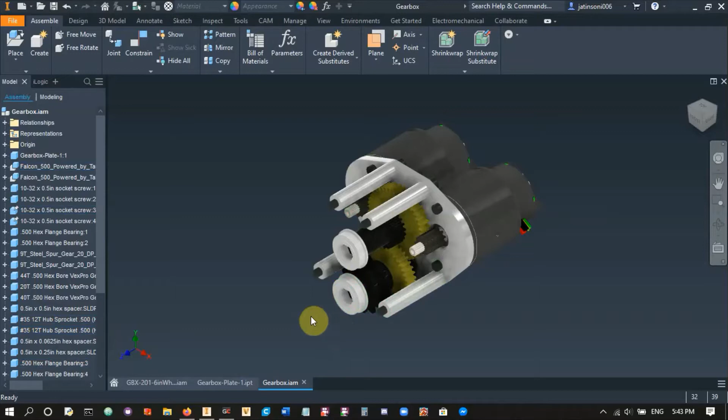Obviously we want the second plate to have the same dimensions between these four holes, these two bearing holes, and all of that. So we could open up the sketch for this plate, copy it, and make a second part. That would work. The only problem is if I were to go back and change something on this plate, like bigger or smaller gears, my second plate wouldn't change.

I would have to go on the second plate as well and change those dimensions. So instead, we can use what's called derived parts, so that my second plate depends on this first one, and anytime I change anything about this first plate, the second one will also update. To do that, we'll go and start a new part.

My setup automatically starts a new sketch, but we don't need that. We'll go under Manage, Load, and if you see here, there's this button called Derive. We'll click that and it'll open up a dialog box.

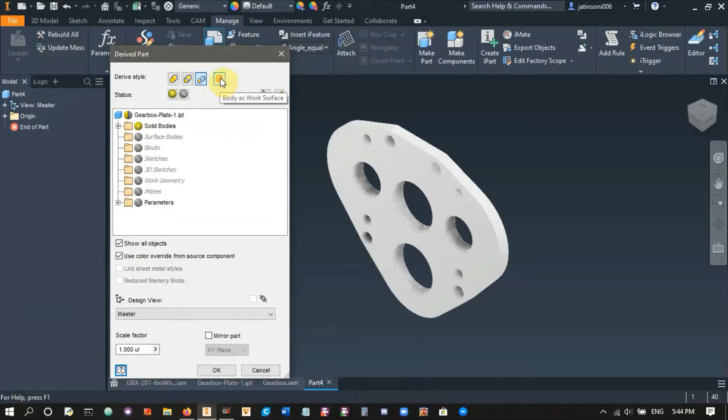We want to click on the first plate, this one. Hit open and it'll open this settings box, and we want to select this orange flat symbol over here. What this basically means is it's similar to construction - it creates like a surface, and won't interfere with our extrusion or anything like that, and won't think there are two different parts.

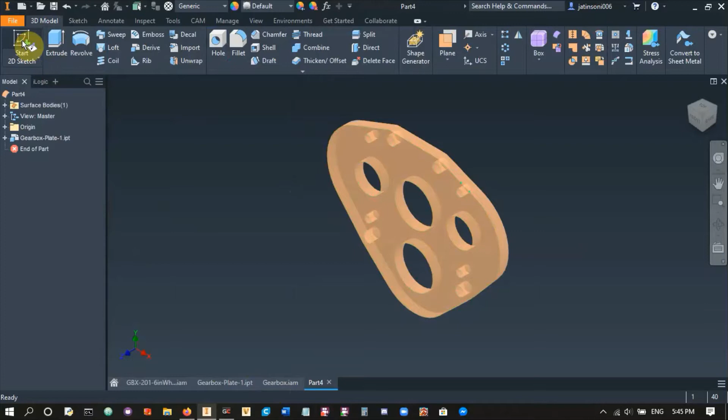So we'll do that. What deriving parts basically does is create a link between this first plate and our second and whatever else we do on this file. Now we can start sketch on this XY plane, and here we can use project geometry. What project geometry does, if you don't know, is basically make any holes, circles, or edges a part of your sketch.

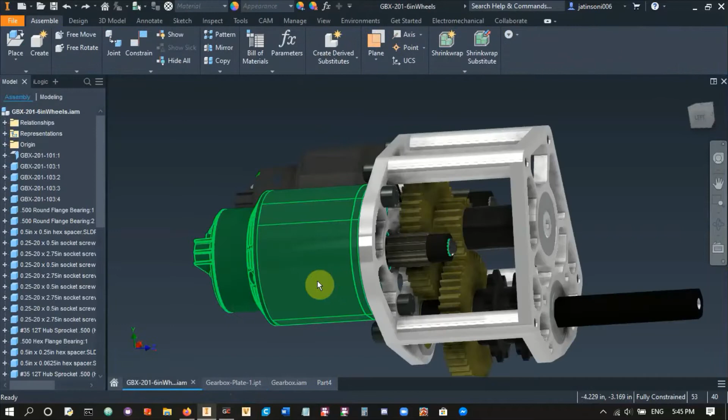We don't need these motor holes, because the motor holes are already done, they're ended here. We don't need anything here for them. All we need to do project geometry for is these two bearing holes and our four holes that hold the gearbox together. If you look on a completed gearbox, we have the two bearing holes and these four holes for the standoffs that are here.

Now you'll see that there are actually four additional holes, and what these holes are responsible for is attaching this whole gearbox to the drivetrain. So let me open up our drivetrain for last year.

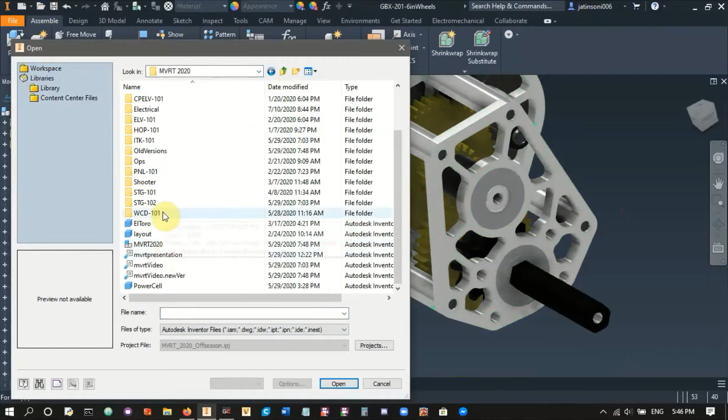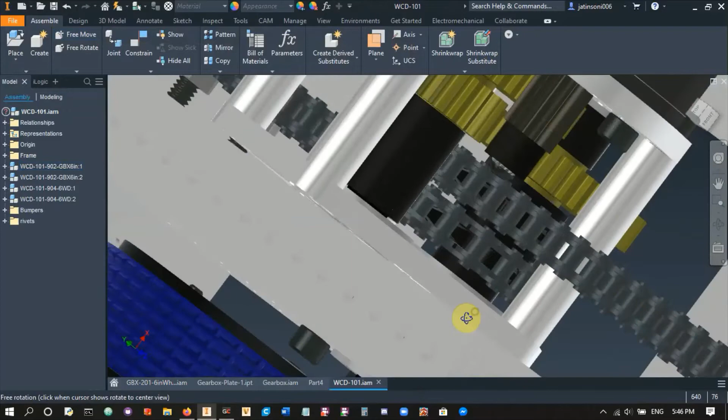So let it open. Okay, if you look, let's get rid of the bumpers. You'll see here that the gearbox is attached to this 2x1. So that's my gearbox, that's the 2x1. It's attached using these four screws over here.

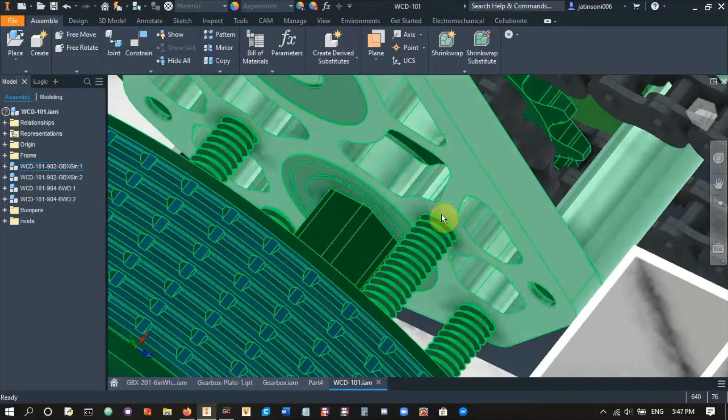What happens is these four screws you see over here, if I move the 2x1 out of the way, attach to our gearbox plate, and this is where there's a tapped hole so the screws can thread into the aluminum plate. There's also a tapped hole for these standoff holes because there's no lock nut over here. So we'll remember that all those holes need to be tapped.

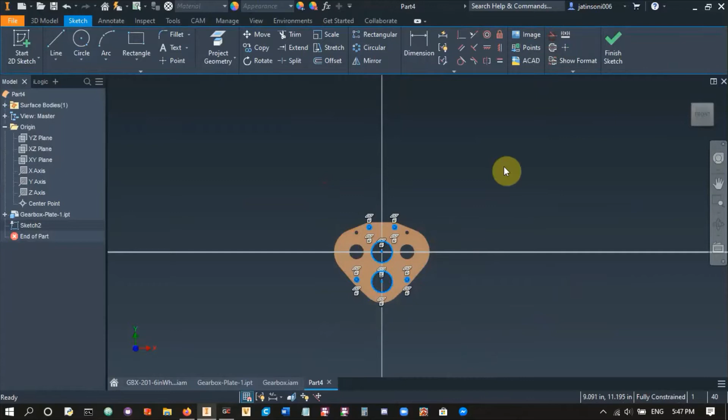So what we can do is make four additional circles over here. Before we start that, let's make all of these non-construction - it should automatically keep them solid. I think I have a setting that makes them construction. So we'll do circle, and let's make four more. We'll make one there.

At this point, we can go over here in surface bodies, hit plus, see this one, and right click and turn visibility off, because it gets a little bit annoying to have to see that thing the whole time. So we'll be left with like a normal sketch, and what we can do is add two more circles.

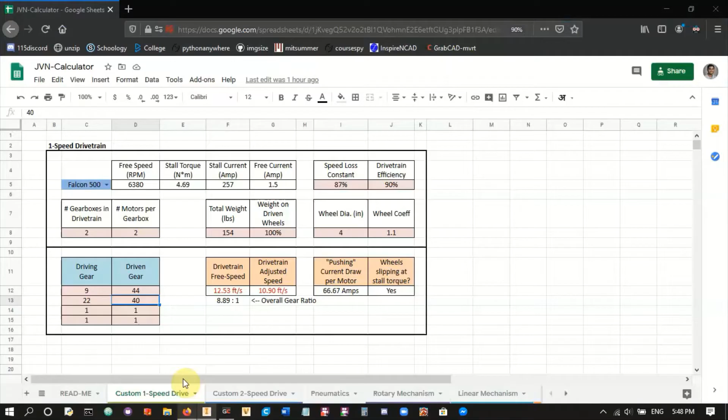Let's make them all equal to each other, and equal, right? And remember that all of these need to be tapped, and the screws we're using are quarter 20s. So if we head over to our chart, quarter 20 screws, if we're going to tap them, the hole size is 0.201. So we'll come in here, give these a dimension of 0.201, and let's move them somewhat in place.

So there we have them. Now if you see, these holes are actually bigger than the 0.201, because remember, we just projected geometry from this first plate that we made, but these holes need to be smaller. So what we'll do is make circles here, and make these equal to our new holes that we just made, right? And because we don't need these outer holes anymore, we can make them construction.

Let's do that for the other 4 holes here. So we'll do here, make it equal, and we'll make this construction, not unconstruction. Circle here, circle there, make these 2 equal. Let's make these 2 construction. And if you hold down shift, you can select multiple items in a sketch like I just did here, then hit equal between this one and that one. There we go, so they're all smaller now.

Right, so how do we arrange these 4 holes over here? You can do all sorts of patterns here, but generally what you want to try to do is have a common pattern, so that in case you need to swap things out, you're not trying to figure out what pattern you used. So usually what I like to do is get rid of all these random holes here, we'll just have one, and give it a dimension from the center.

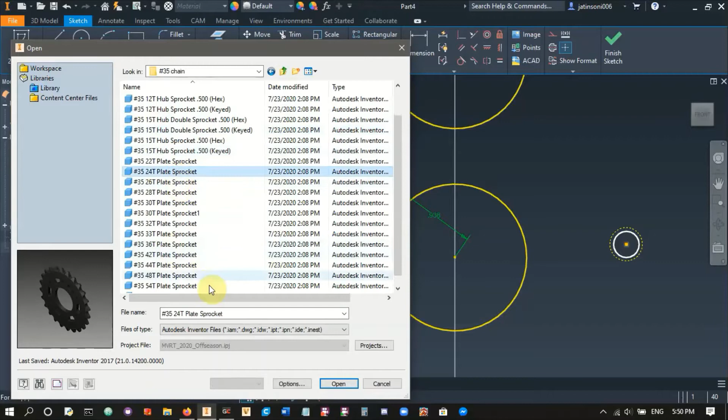So we'll go to our parts library, we can go motion, let's do sprockets, and open up one of these, for example. So this is a sprocket, and you can see there's these 6 holes everywhere, right? So if I measure these, if I go tools, measure, if I measure any 2 opposite holes, they are 1.875 inches apart. So this is the pattern I'm talking about. And you could use any pattern you want really, but this way it just makes sure that you have something you can remember easily.

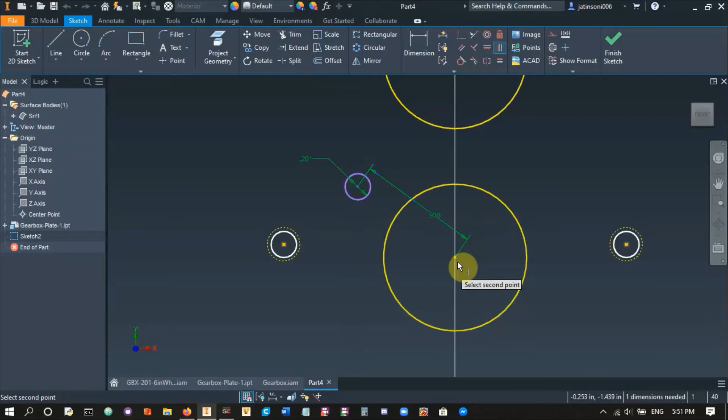So 1.875 divided by 2, because this is the radius, and we'll make it vertically constrained over here, right? And you're thinking, wait, it's gonna collide with the other bearing hole, right? But we're actually not gonna use the top and bottom holes here. So what we'll do is a circular pattern, select that circle, and for the axis we'll select this point here, and you see it makes 6 automatically, so we'll just hit OK. Then we can select the top and bottom one, and make it construction.

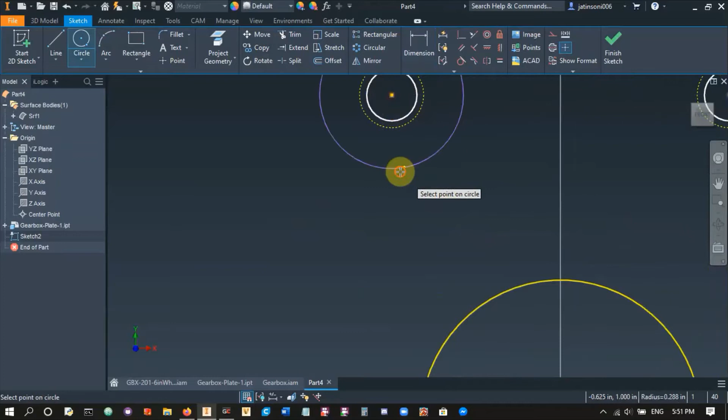So we'll end up using only these 4 holes over here, right? So that's all we need on our plate. So what's the final step? Now we have to make the outside shape, right? And remember, with the first plate, what we did was we made circles around our screw holes, and we made these dimension 0.5. So we're gonna do the same exact thing here. We'll make more circles around here, and around here, and around there. And we'll make all of these equal to each other. There we go, and equal.

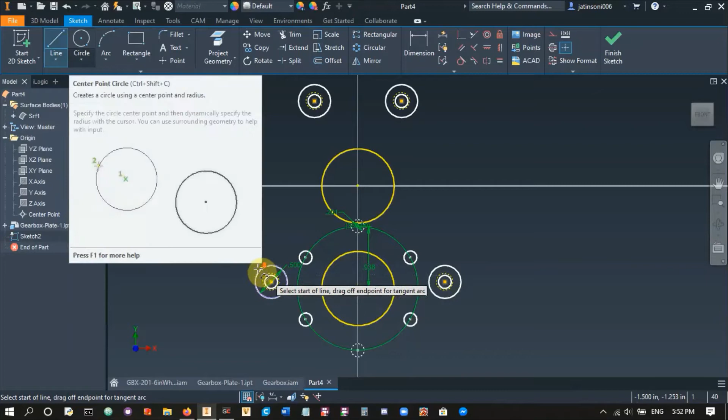So those are our half inch standoff, the standoff itself is half inch diameter. And the final thing left to do is connect some lines. So we'll go here, and connect these 2 lines. I don't know why it's giving this thing here. As you can see, if I were to connect a line between these 2, it wouldn't work because all these holes would be cut off. So what we can do instead is just make a circle around these holes as well, and make it the same dimension as this 0.5 over here.

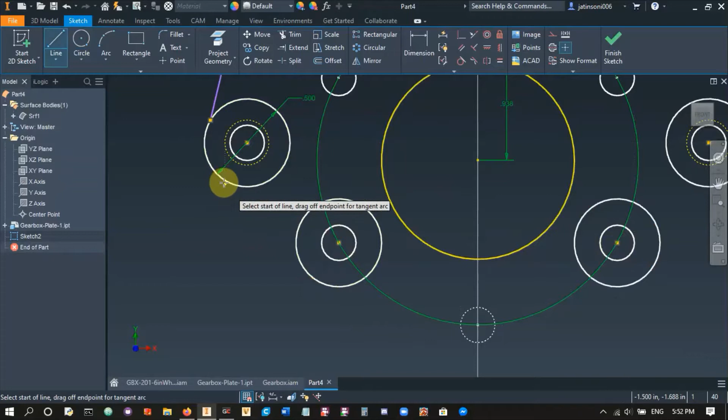So anytime you're trying to make the outside shape and you run into the problem of accidentally cutting off holes, or not having enough material around something, you can just add a second circle which will be the boundary, and it can define how much material you want.

So we'll make these two lines tangent to the circles so that everything flows smoothly. So those are two lines there, and then we need a line in the middle here. And remember, we're not going to be using the sixth hole here, that's why it's construction, and that's why we don't care that the line's above it.

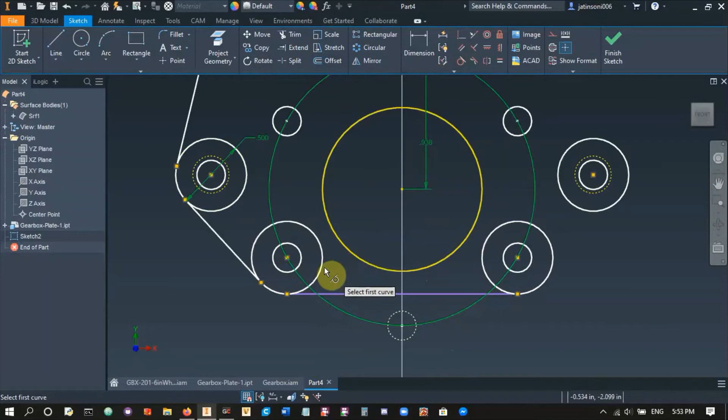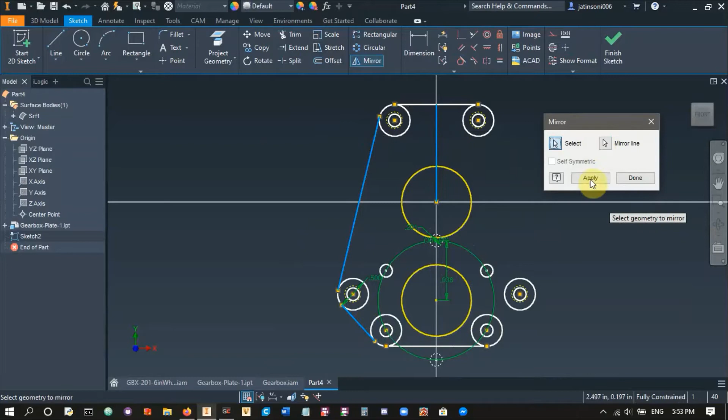So we'll make these two tangent here, and let's add a line over here on the top. And there we go. Now I could make these two lines there, but I'm just going to be lazy and mirror it. So we'll make a line there, and then we'll use mirror for these two lines. Here's the middle line, hit apply, and then we can just make this middle line construction so it's not annoying.

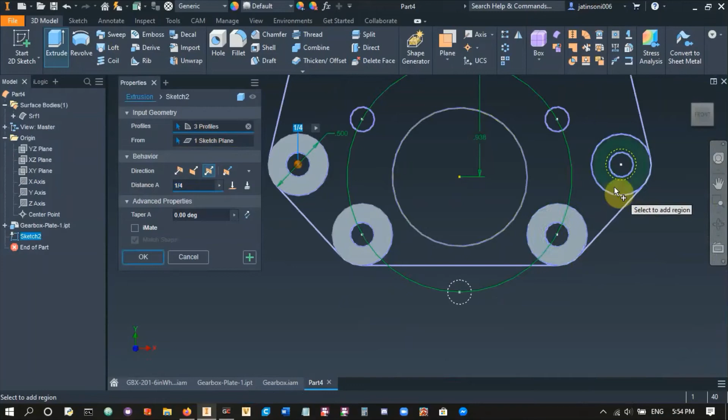We can finish sketch, extrude, and we'll make it symmetric and 1/4 of an inch again because we want this to be strong. And we want to select everything that's not supposed to be a hole. So this part, this part, this part, this part, and this big section over here, and these two sections over here as well. And there we go. There's our second plate.

Alright, and so we can save this. Let's do Gearbox plate 2.

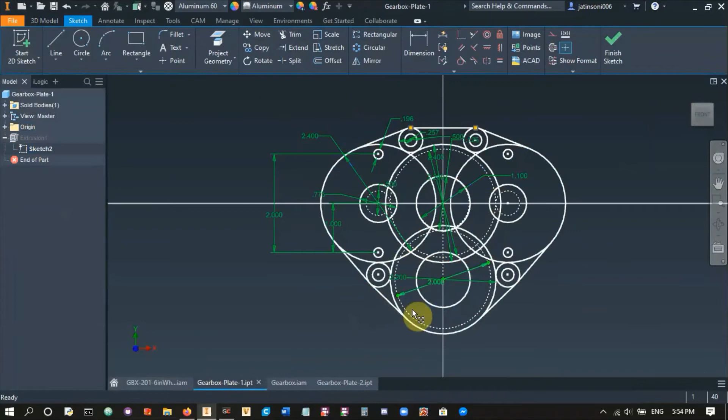Here's the part where it's really helpful, because if we go back to our original plate, plate number 1, remember this circle over here, the screw, is tangent to this circle here. So if I were to move the screw hole, let's say make it 2.3, you see it goes left. We finish the sketch, you see how those holes moved, and if I go on the second plate, you can see this orange lightning symbol lights up, which means there's an update that's happened, and if you click on it, it'll update the part. So if you look, those two holes just went further left. And so this is the advantage of making derived parts.

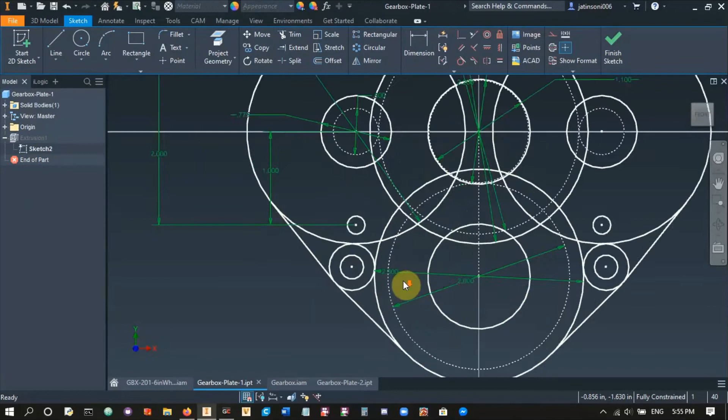I can go in here and change these dimensions to whatever I want, and this part updates. If I go in here, this one will also automatically update.

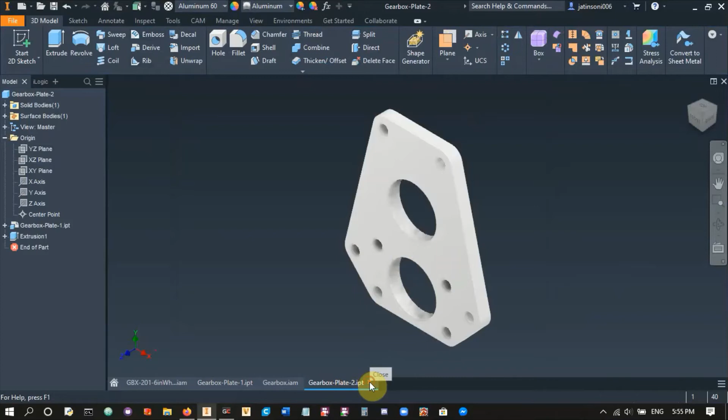And then let's set our materials. So we'll go aluminum 6061, save the file, and we'll close that. We can close this one too.

Right, so we're back to our assembly here, and you can see there's an update symbol because this file was edited. So we'll go place, and let's place our second file here, hit open, there it is, and now let's constrain it.

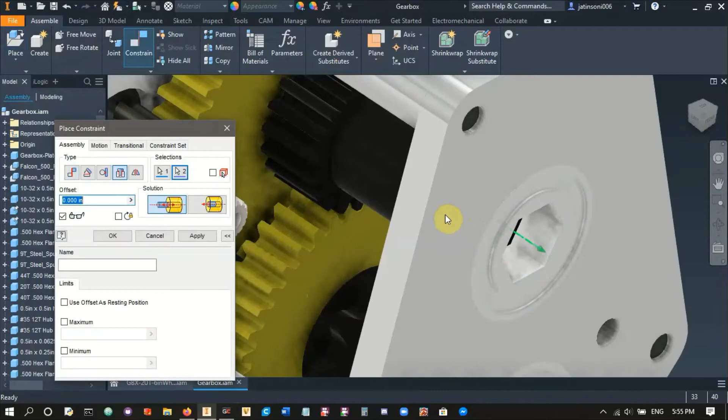So we want insert constraint on the bearing hole over here, so now it can swing around, or should be able to swing around like that. And the next thing we can do is use this hole here for the standoffs. And there we go. So there's our second plate, and this gearbox is done basically.

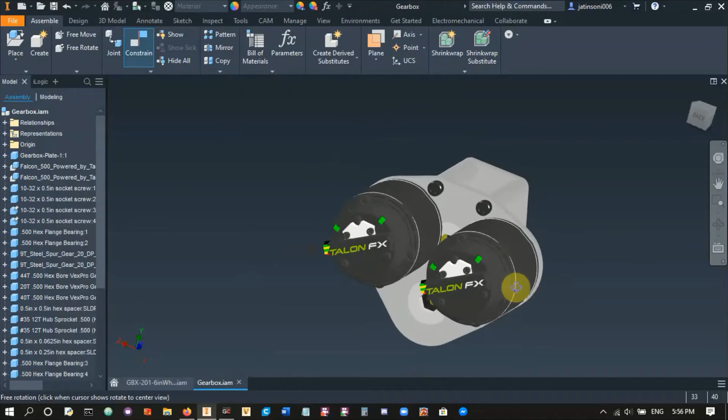We just need to make our hex shaft. So let's go on tools and let's measure this distance here. So we'll measure this in between the motors here. There's the bearing. So we need a hex shaft here that's 2.776 inches long.

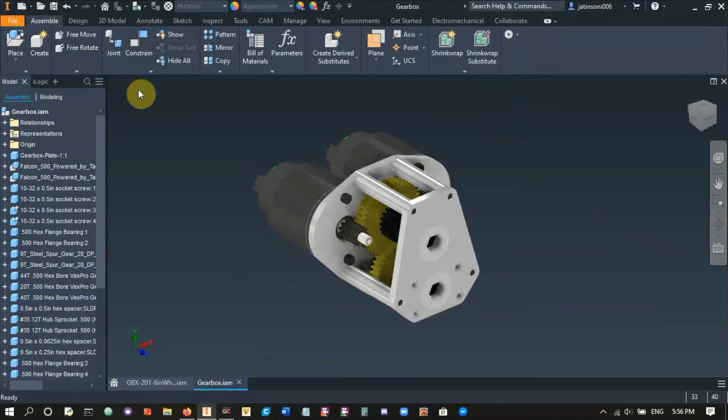So what I will do is, well, we can make a hex shaft. We can review making hex shafts again. So we'll go here, we'll go hexagon, and all of this should not be new at all because we've covered making hex shafts before.

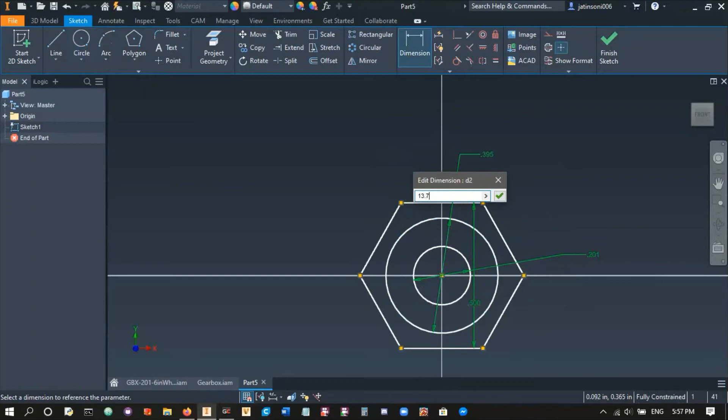So 1/2 inch hex shaft, let's do a central hole of 0.201, and if you remember, this is dimension for a tapped 1/4-20, which means you can actually tap hex shafts. So we'll go here, dimension, and this was 13.75 millimeters or 0.541. So we'll finish the sketch, and we wanted this to be 2.776 inches long.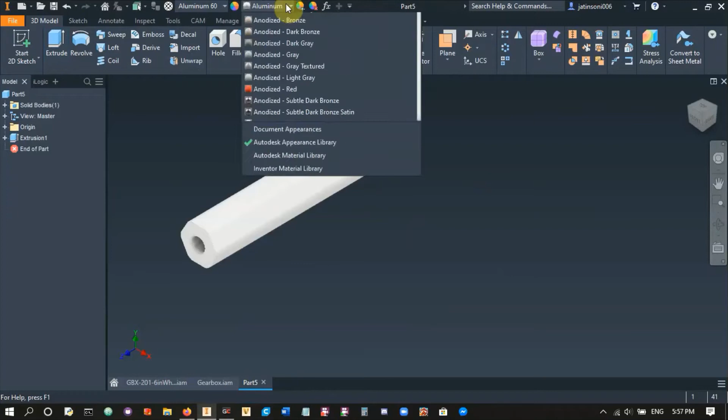So we'll make that 2.776, hit OK, and then we want this to be aluminum 6061 I think, and you can change the color of it to anodized black or anodized dark gray. I like the dark gray a little bit better, so we'll just use that. Control S, and we'll make it hex shaft 1.

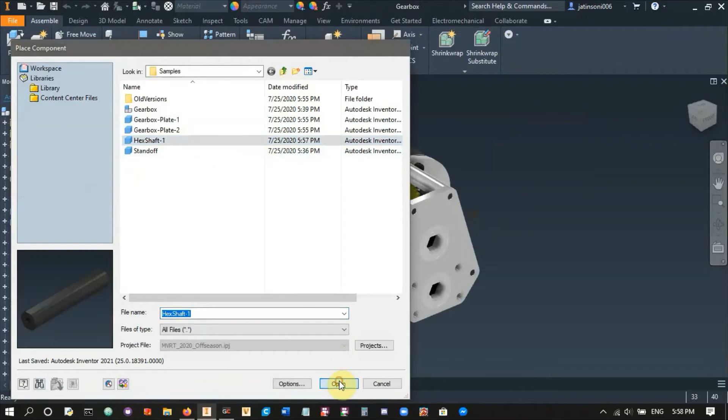There we go. So now I will place this hex shaft here like that, and let's constrain it. So we'll do insert, you can select the circle of the hex shaft and the circle of the bearing, and right now it's going the opposite way, so we just hit opposed, or is that opposed? No, that's aligned. Apply. And there's our hex shaft.

Now, do you see a problem here with the hex shaft?

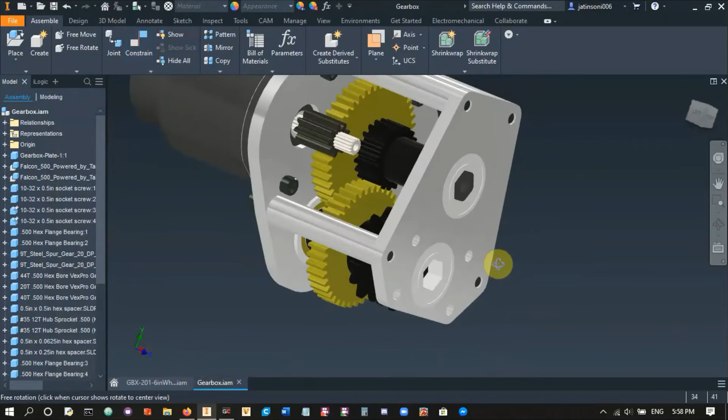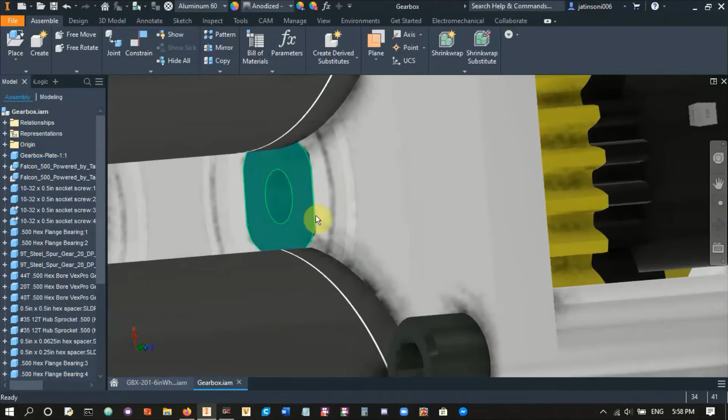It's in the right place, we have our spacers, we have our gears, but the problem here is the hex shaft can move in and out freely. Because this bearing is a hexagon and this hex shaft is a hexagon, in real life it can move in and out. There's nothing holding my hex shaft inside there. Same thing over here. The motors are kind of touching the hex shaft, so it probably wouldn't come out that way, but it can come out this way. And if the hex shaft comes out, all of my spacers and gears would be loose in real life. So how do we make sure this hex shaft does not come out?

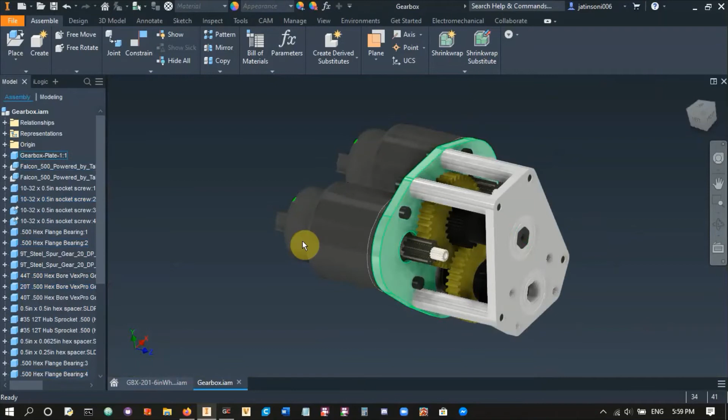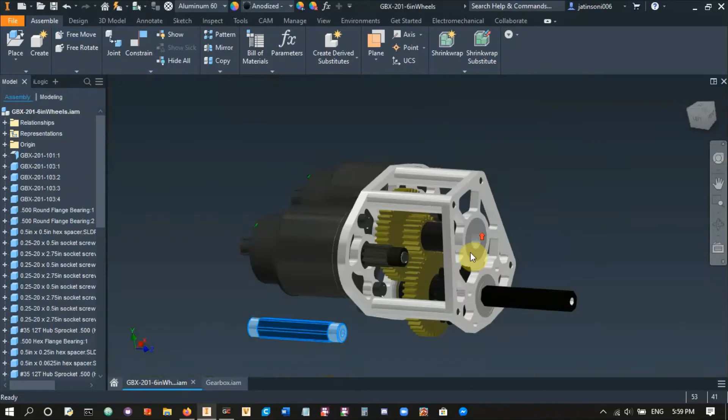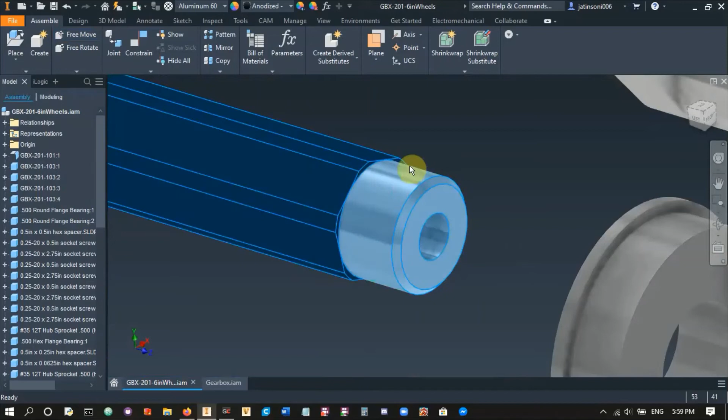This is where I want to introduce a new concept of cluster shafts. If you look in this gearbox here, if I pull out this hex shaft, it's a hexagon in the middle, but the edges are actually round. And if you look at the bearing closely, it's not a hexagon bearing, it's a round bearing. Because the round portion is smaller than the hexagon profile, there are these ridges, and the bearing is a 1/2 inch circle. So the hexagon bit can't go through the bearing because the hexagon is bigger than the circle inside the bearing. We have the same thing on both sides. So with a cluster shaft and round bearings on each side, this hex shaft won't be able to move around, unlike this gearbox over here.

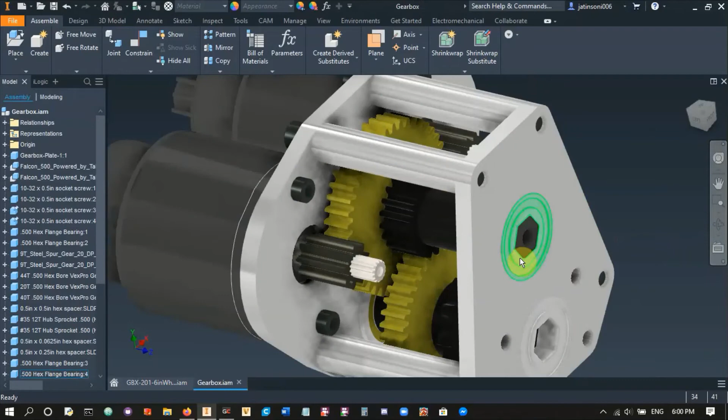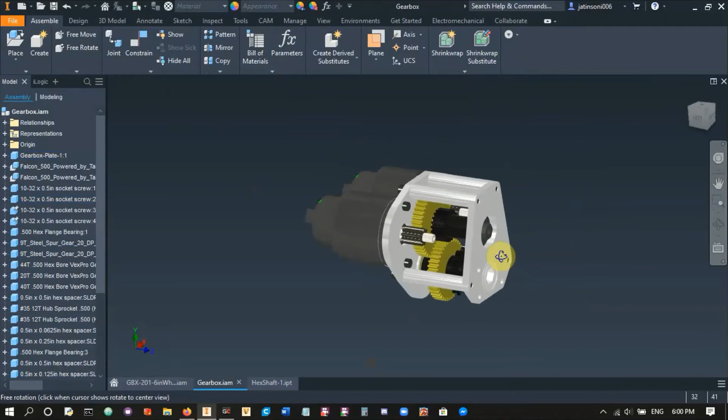So what we'll do is open up our hex shaft and change the edges to be circular. Now we need to remove our bearings here as well, so we'll select these bearings, that one and that one. If you hold shift, you can select multiple parts, right click and delete. Now that should make our hex shaft able to move around because the constraint is no longer there, and our gear could probably move around too.

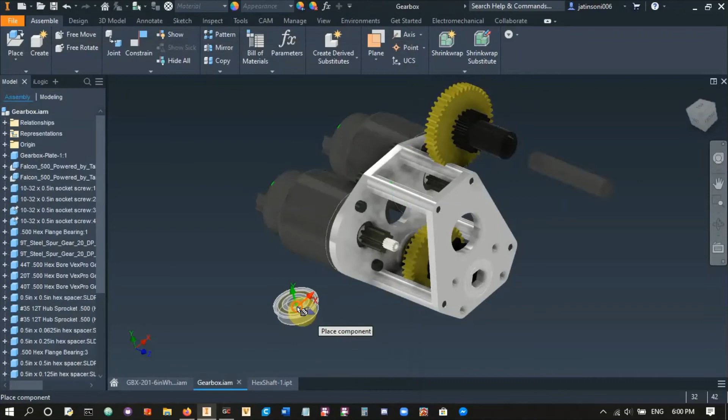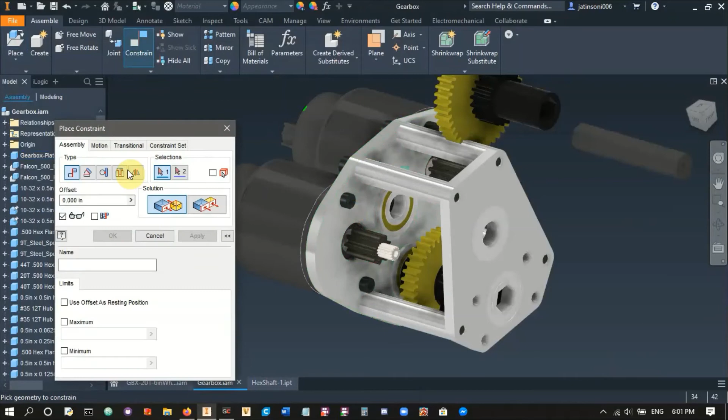Yep, there it is. So now what we need to do is place round bearings here. We'll go to place, back to our library, motion, bearings, 1/2 inch round, open that, place those two here, and then we can constrain them. These constrain the same exact way as the hex bearing: pick the outside flange, then pick the circle on your plate and hit apply. Same thing on the other side. There we go, hit apply, and there's our two bearings. Now we can constrain our gears back in place so they're not freely floating in the air.

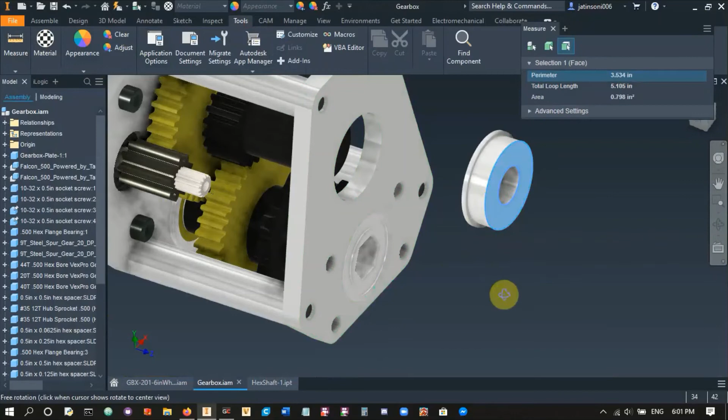And there we go, our gears are back. The final thing we need is to make our hex shaft have those round edges. So what we need to do is find out how tall this bearing is. If we go on tools, measure, we'll measure this face of the bearing to its front, and it's 0.313, or if you make the measurement more precise, 0.3125. So that's how big of a round we need.

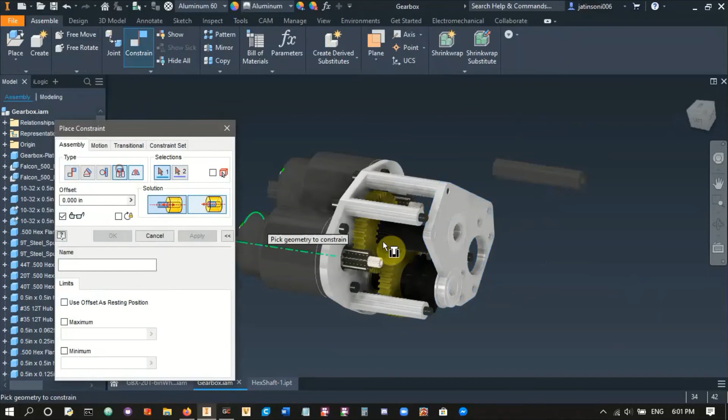And remember, we constrained our second plate to the bearing as well, so now it's also able to move around, so we need to constrain that too. Let's constrain, insert, you can do a second standoff constraint, and that one, hit apply, and that's good to go.

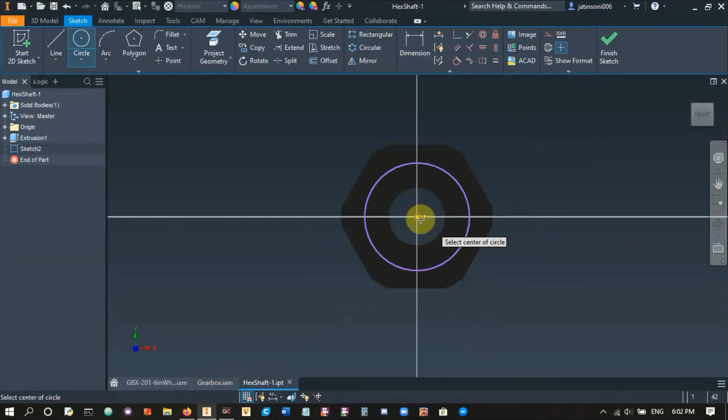So let's hop over to our hex shaft, and what we can do is start a sketch at the edge of the hex shaft and create a circle. If you're wondering how this would be done in real life, you would use a lathe and cut away these edges of the hex shaft into a round portion. So for our round bit, we need to make the inside 0.5 - actually this would be the outside. You see those extra ridges here, and then we can make this outer dimension really anything, so we can make it like 1 inch. Because what we're going to do is finish the sketch, extrude, and cut this part out.

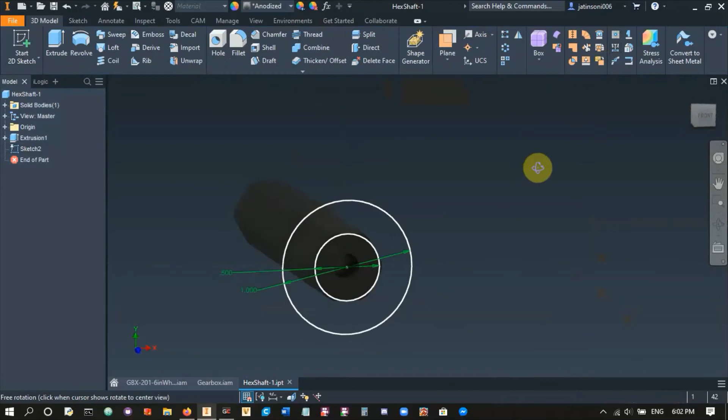So if I'm in cut mode, it will cut away anything that's there. And remember, this dimension here was 0.3125 inches, or 0.313.

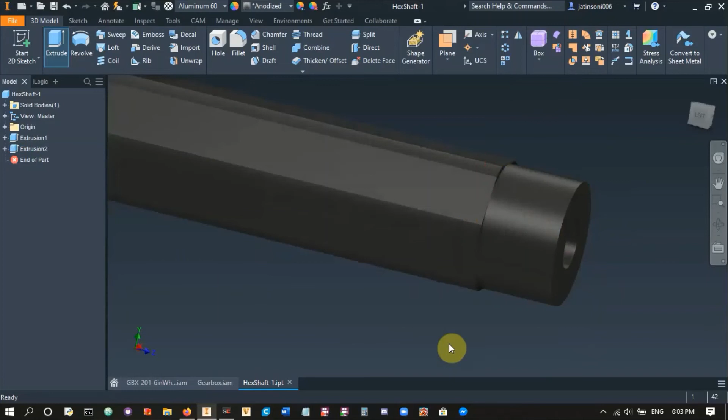Right, so that's the portion we want. Hit OK. Generally when you do this on the lathe, the black portion is like a paint layer on top, and it comes off. So I just like to simulate that in CAD and make this aluminum, flat again, so we can see what an actual cluster shaft would look like.

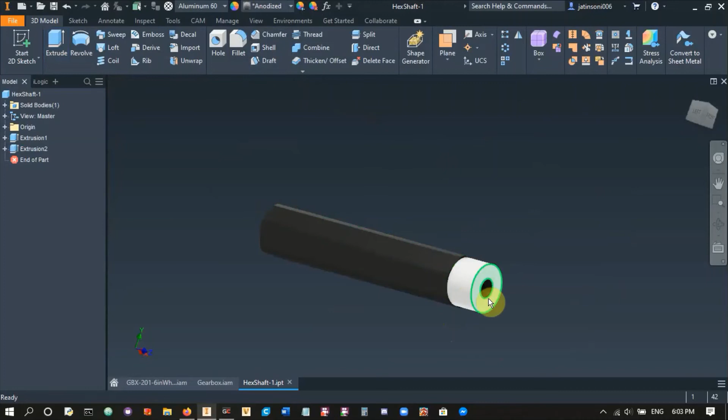Now you could do the same thing on the other side, but because we made this symmetrically, we can just mirror it over. So we'll do second extrusion, mirror it over our middle plane, hit OK, and there's our second cluster. But we do need to change the colors for it manually, so we'll go back to aluminum, and there's our shaft with clusters on it.

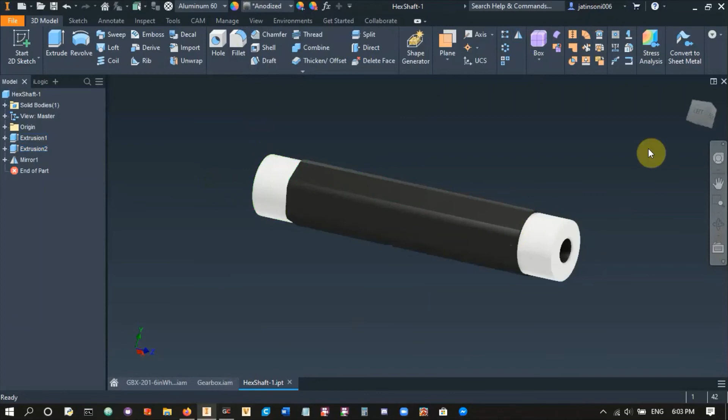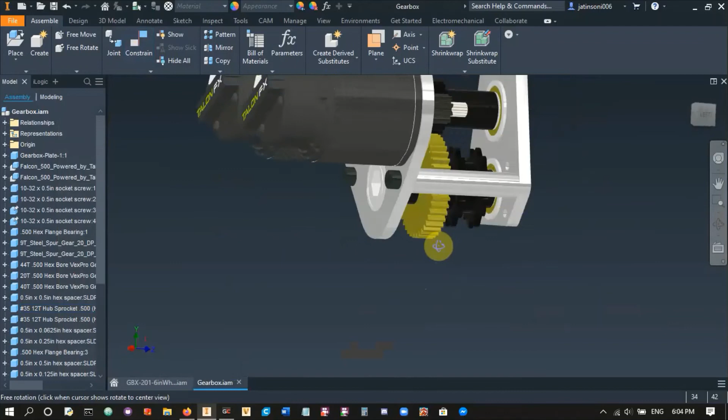So we'll do Control S, close this, and now it's here. As you can see, it has the cluster on it. So we'll just do an insert constraint again there, and to the bearing, align this time, apply, and there we're good to go. Now we need a second hex shaft here, and remember this hex shaft from here goes out to the wheels and everything.

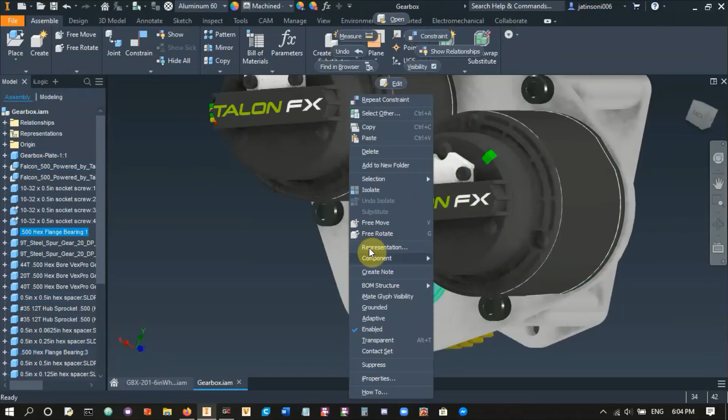So this bearing can be a hexagon, but over here in the back portion, the hex shaft doesn't need to go anywhere else, so the hex shaft could slide out currently. So what we can do is make this one a round bearing as well. So we'll delete this hex bearing, and I'll just copy, Control C that round bearing and paste it here, and we can constrain it like so.

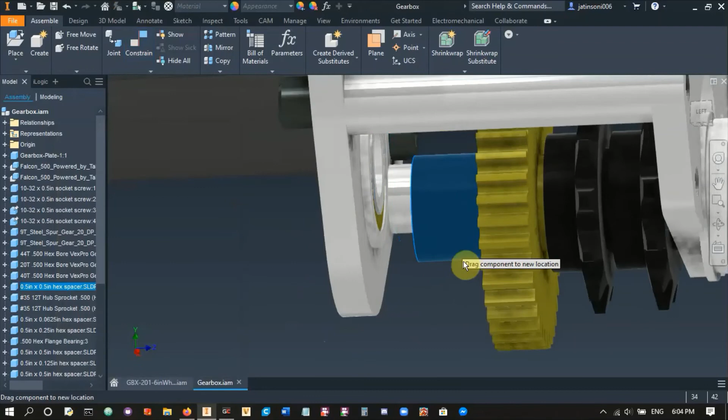Oh, that's the wrong one. We want the flange of the bearing to this plate over here, hit apply, and it should have taken away our gears, right? So it can't move away now. So we'll do another insert on the spacer to the bearing, and that is fine now.

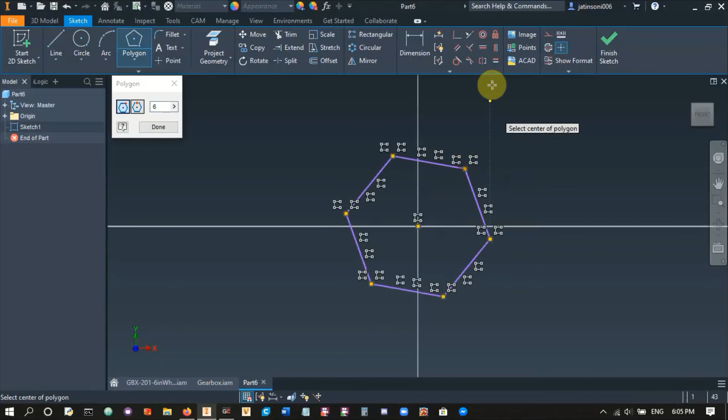Right, so we need to make a second hex shaft. So we'll go new part, and I'm just making a hex shaft here so you can, it's like a review, but I do have templates to make a hex shaft which work a lot faster. So we'll do 1/2 inch, and we'll do our central hole as 0.201.

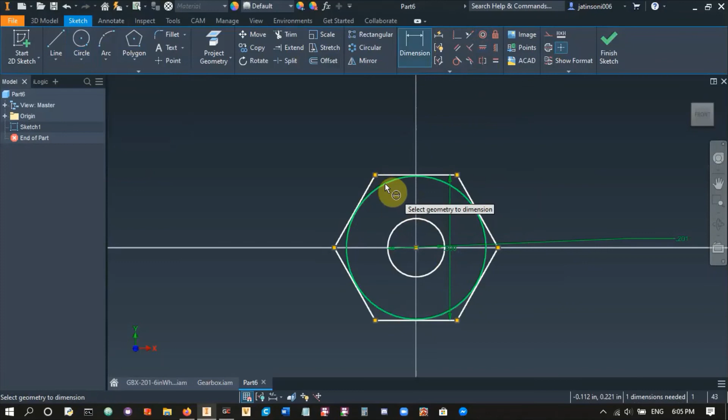Alright, 0.201, and we'll do a second circle for the ThunderHex part, the rounded edges, and we'll make this 13.75 millimeters. Finish the sketch, extrude it. Now this one, when you're making your gearbox, doesn't have a specific length to it just yet, because the length of this hex shaft depends on how far your wheel is and where your wheel ends. So for now we can just say 5 inches, and that works.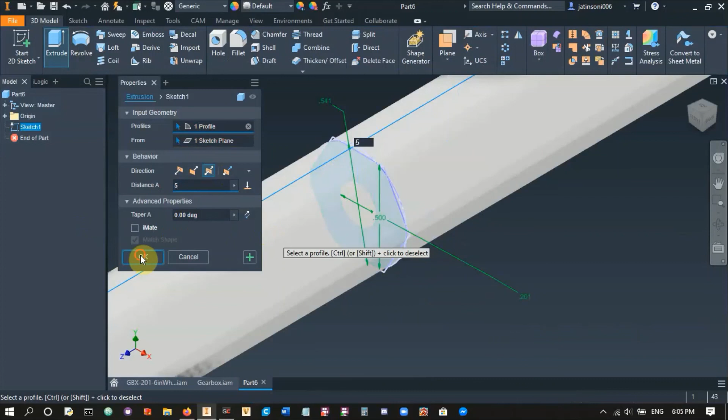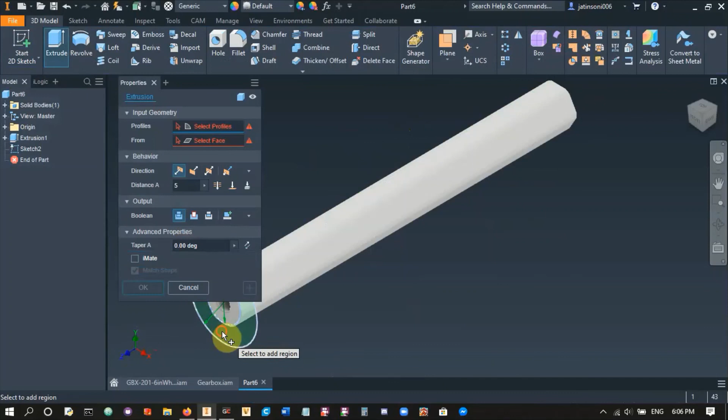And then we'll go in here, make a sketch, because we want one side to be rounded off, because we're going to have a round bearing at the end. So we'll do 2 circles and dimension them. We can make this 1 inch, make this 1/2 inch, finish the sketch, extrude it, and we want to cut that portion to be 0.3125 inches, hit OK, and now we can set our material.

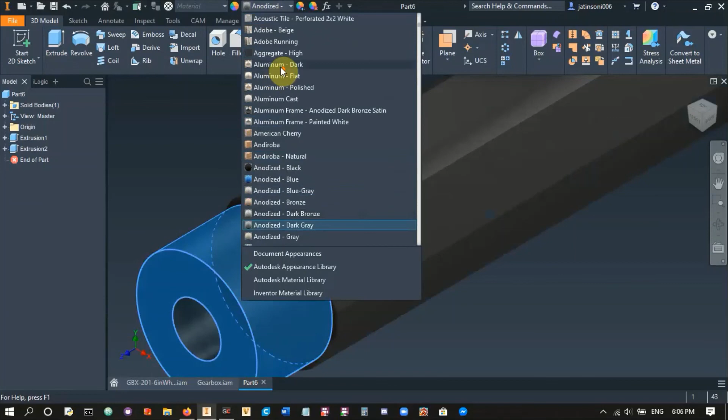So aluminum 6061, anodized dark gray, or you can do anodized black, doesn't matter, and aluminum for the round part, and we'll save this as hex shaft number 2.

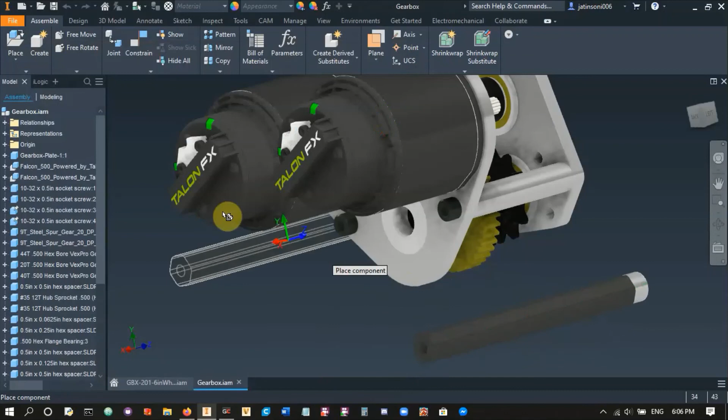And so we'll come back here, and we're almost done with our gearbox actually. So we'll do place, let's go back to our workspace, hex shaft number 2, place that, and then we can constrain it. So let's go back to our hex shaft, there it is, and we will constrain it to our bearing over here, there it is, apply.

And so now our hex shaft can't move inside. Right now it can move outside, but on the actual robot we'll have shaft collars and/or like a screw and a stand washer at the end, so that the hex shaft can't move out the other direction.

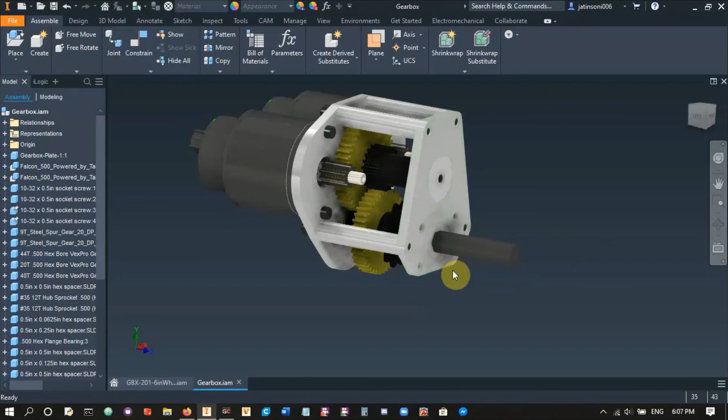So that's it. That's how you make a gearbox. That's a complete gearbox. Now on our actual gearbox we do what's called lightening or pocketing.

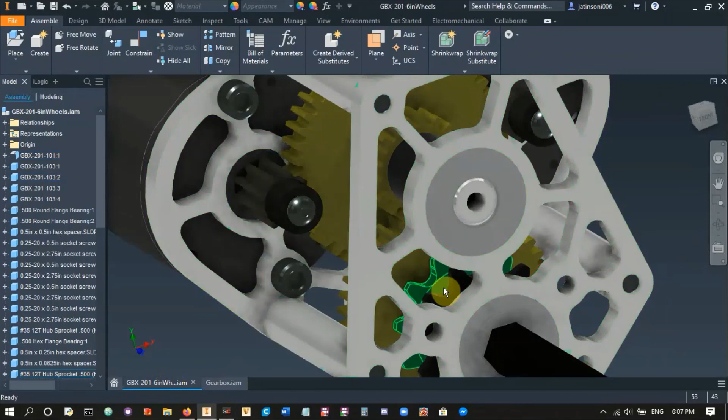Basically you see all these gaps in the plate compared to this solid plate over here. These gaps are basically so that we save on some of the weight, and the way they work is they still provide enough strength for this plate, so it's not like you just cut away a random portion, but they also save on some weight, and that's already covered in another video, but that's not necessary for making a gearbox. So there it is, our complete gearbox and our first completed CAD challenge.